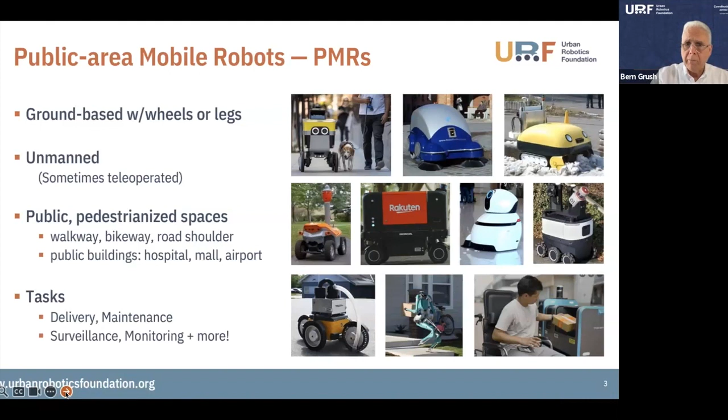On the lower right, that person is taking a delivery, but there are no humans present. These devices might be teleoperated, but they're always in public spaces, pedestrian spaces, all sorts of indoor and outdoor. What matters is that there are pedestrians nearby. These devices do all sorts of tasks: delivery, which we'll hear about today, maintenance, surveillance, monitoring, and so on. Any task amenable to robotic action is included.

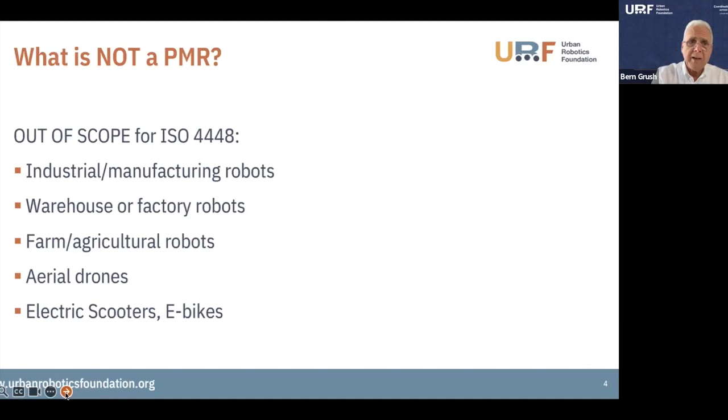Out of scope is anything in a structured environment. I'll talk about that in a moment, but those working in warehouses and manufacturing, on farms or in mines, for example, are excluded. Aerial drones are not included. Electric scooters and e-bikes are not included. So it's not just because it's a small thing on the sidewalk — it's that it's robotic, it's in public spaces, and it's on the ground. Those are the important issues.

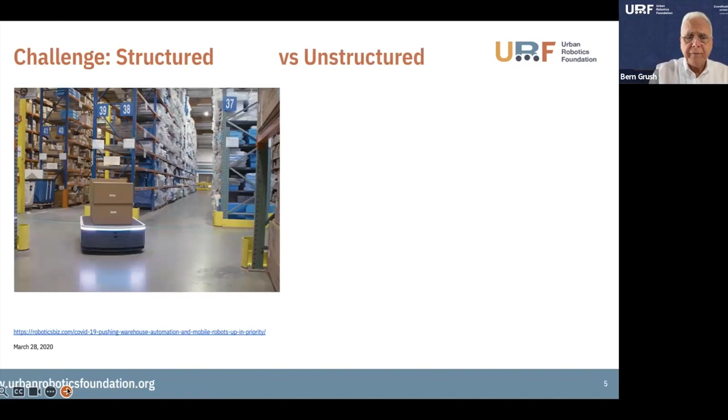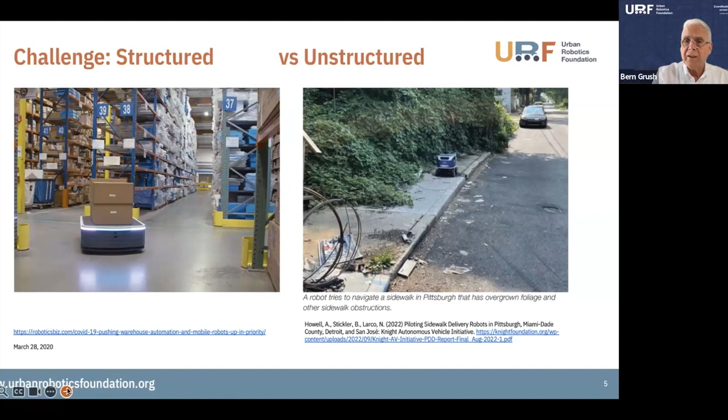Structured environments, which we know a lot more about, have been around for a long while. Robots have been around for 50 years, but in heavy commercial use for the last 10 or 15, in manufacturing and warehousing. Now if we want to move them to the sidewalk, here's an extreme case. On the right is an extreme example of a very obviously difficult place to navigate — a horrible example of an unstructured environment not designed for robotic use. So that's the major difference.

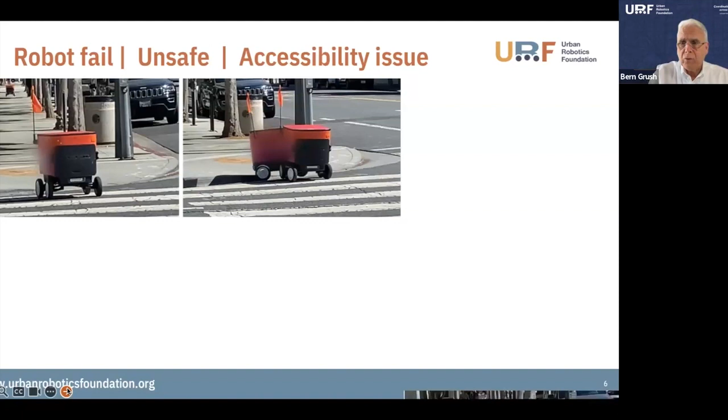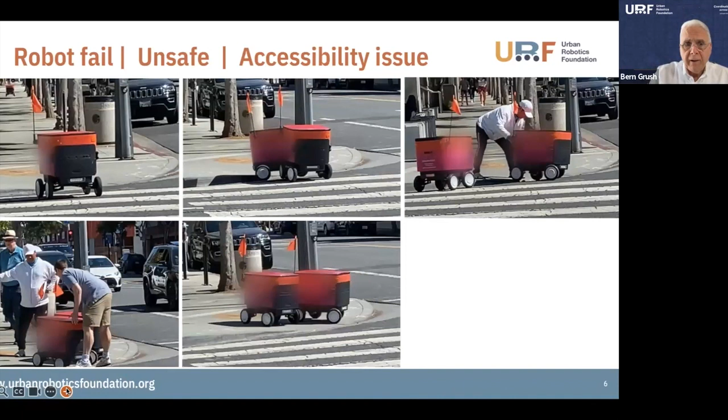Then a pedestrian came along to try to help out. Consider that we ought not to have pedestrians volunteering to move these devices because of insurance concerns. A second pedestrian came by to help out as well, making it yet more complex. Eventually the two pedestrians repositioned them on the sidewalk, but in the area where the ramp is, which would then block wheelchair use. Finally, someone from the company came along to move one of them away.

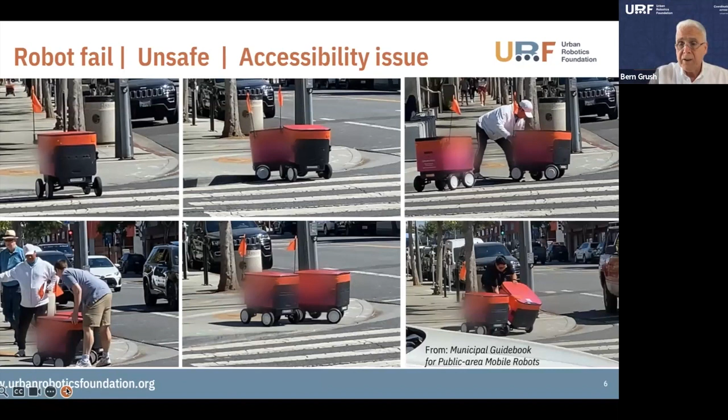The point of this is that we need a body of rules that minimizes this kind of event ever happening — that minimizes pedestrian involvement in moving and rescuing these devices, because of the insurance concerns and because of the safety of other pedestrians in proximity to the robots.

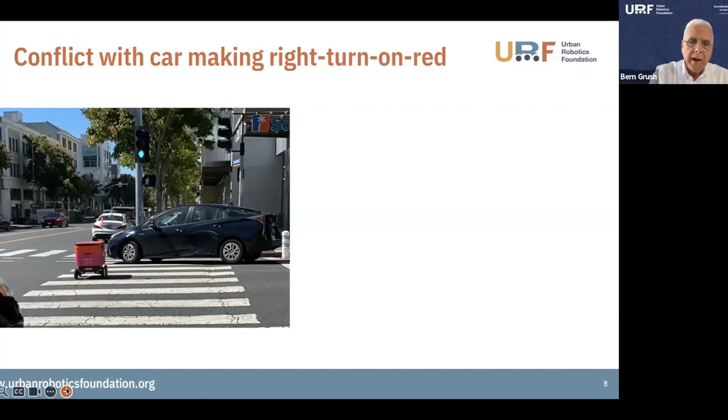Here's another case with the same robot that was waiting. It finally decided to cross the intersection, and did so correctly, on a green light. While doing it, a car blocked its path. What happened then is that it's dangerous for the robot to turn around and go back, because the light might turn red. So this robot chose to go around the vehicle, and in doing so, went out into the area where a cyclist might be traveling. So these are the kinds of things the standard is set up to avoid, or to help write bylaws about.

This is talking about all forms of human mobility challenges. We often consider wheelchair users and blind pedestrians as the obvious cases. This is a case of a disorder called kyphosis, where this pedestrian cannot stand up straight and cannot see very far forward. In this case, and this person is not blind as far as we know, a PMR could block her path.

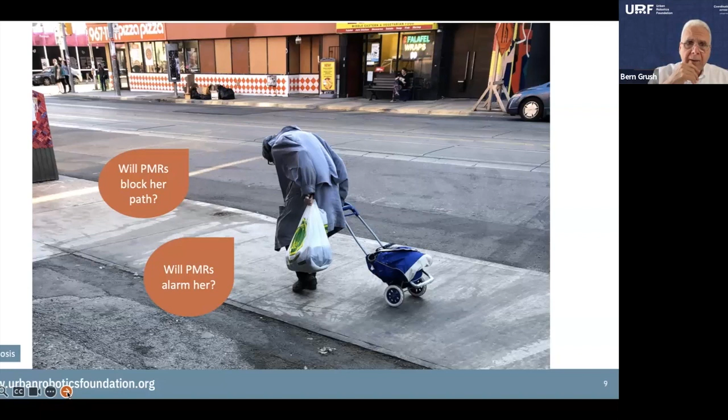It could alarm her as it comes by her. But the flip side is that PMRs could deliver groceries to her, or a follow-me PMR could carry her bags for her. While doing so, it could actually help protect her, because the PMR would be able to see further than this pedestrian could. So the net of it is: how do we have the world collaborate with and help people with mobility challenges while serving them, and make sure we don't alarm or harm them while operating on the sidewalk.

So that's a dual case. So very quickly, we were founded just about 2 years ago now, and we work in this. I think you can see it's urban space and accessibility, as I just showed in the last couple of slides, and these mobile robots.

The draft of the standard that we're working on - we are the project managers of an ISO standard that Lee has already described to you. That draft is to be published in 25 and 26. There's 16 parts to that draft. I'll talk about that at the last slide if we have a few minutes.

We are publishing a municipal readiness guidebook that will start early next year. Those are already over half written. And we deliver workshops and educational materials, advisory services as well for those cities that are setting up pilots and trials and so on. And I underscore that we are a global organization. We have members in many countries around the world, and we are a nonprofit.

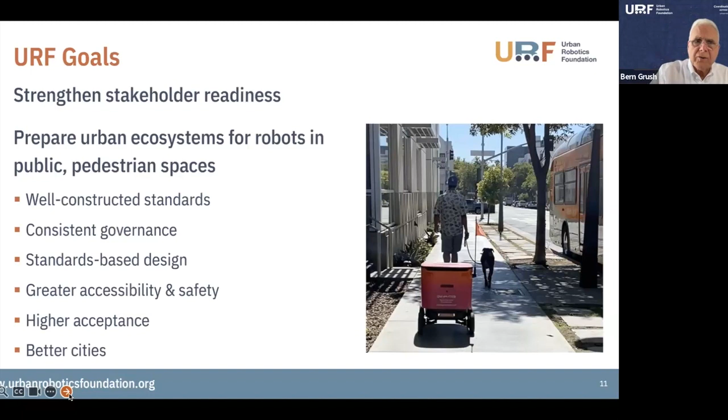So, of course, it's important that these standards are well constructed, that they're consistent, that they are focused on project and deployment designs, that they always are focused also on greater accessibility and safety. And we're seeking acceptance from the populations of people that these robots are operating in, and altogether to have improved city livability, better cities. So our members, you can see here, include government planners, because our writing is geared toward government planners and sort of smart city public works sort of things.

Public facilities as well - hospitals and airports have pedestrian spaces within them that these robots operate on. In fact, our speaker today, their robot frequently operates in airports, inside an airport in that pedestrian area where passengers are occupying, waiting for flights and so forth. We're concerned very much about accessibility, as I think we've made plain in a few slides ago.

Technology companies such as Ottonomy today is considered a technology company. Also fleet operators - in this case, Ottonomy also operates fleets that they built themselves, so they sort of do both roles. And of course, we have researchers as members as well.

So how this works together - why there is on the left this issue about standards, and you can see some of the standards of mapping and orchestration and safety and certification and so forth. It's all sort of technology oriented, logistics oriented, operations oriented, and it's all about improved delivery of technology, not delivery of food, but also that.

In any case, on the right, with the guidebook, it's really about governance and livability. And in this case, it's to boost urban confidence. So how these two work together: in the middle, on one hand is industry, on the other hand is cities. On the left is technology, on the right is projects, on the left is methods, on the right is regulation. So these are the pairings of the concerns for two sides. These pairings have to match, and that's our fundamental goal.

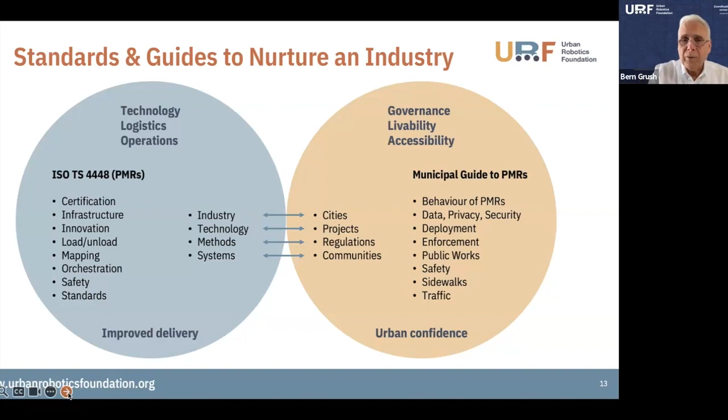What we are doing is those four lines in between these four different expressions of goals, to create an environment where these are safe, valuable, commercially viable, and livable.

So as a member, our principal activities are to help you get prepared, help you to anticipate the impact. Again, this sentence is for municipalities and planners. The roboticists are getting themselves prepared - they don't need our help to prepare themselves, but cities and planners do. All of our members help shape the international standards, and they also help shape the guidebook as well. And critically, our members can network. Today is one example of a potential opportunity to network, in the sense that you can meet each other and you can engage offline, of course, but that networking is a very important part of what we do.

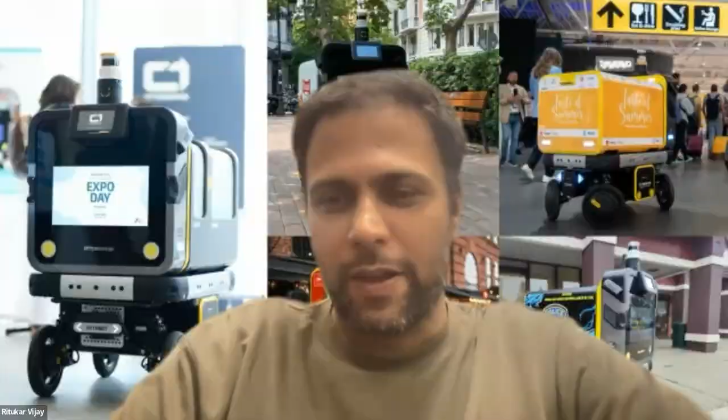Yes. So, hi, everyone. I gave a brief introduction about myself. So, if somebody else has joined, I'm the co-founder and CEO of Ottonomy. And what we do is we develop these autonomous delivery robots for deliveries in hyperlocal space, be it indoors and outdoors. Now, one of the most important reasons why we are doing this is, more focused around labor shortage.

At this point in time, specifically after COVID, there is already a labor shortage, and a lot of people have repurposed themselves to other roles. Because of this, there's a specific deficit of people who can do deliveries. And because of this shortage, there's been a substantial increase in wages, more than 100%. Before 2021, hourly wages were moving around $9 to $12, but at this point in time the running rate is $18 to $25. It has not happened in the last 15 to 20 years, maybe more, that there's a 100% hike in a very small duration of time. So it's very critical, and something needs to be done around that.

It's not that increased wages is the core problem, but how it results either for the enterprises or for customers like you and me. When we order something, we pay almost $7 for a $10 burger, and we add $5 tip, so we end up paying $22 for a thing which is worth $10. So from all those aspects, I think this is an interesting time to put these robots out in public.

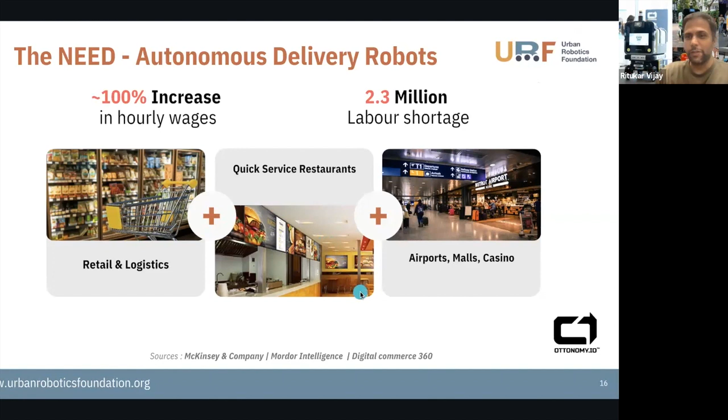Our customer base is spread across retail and logistics, quick service restaurants, and airport malls and casinos. We were the world's first to do any autonomous deliveries at airports, and it's very interesting how multiple aspects come into an airport environment. Broadly, we have the same set of robots doing outdoor and indoor deliveries. For outdoor, these robots are doing hyperlocal last mile, which is anything within a radius of 1.5 miles.

While doing this, the robots are navigating on sidewalks or crossing streets. These robots are also doing indoor-to-outdoor maneuvers, like bringing items from inside the store to the parking lot, which automates curbside pickups. At places like airports, malls, and casinos, they're doing deliveries from the kitchen to various locations within that large area. This is heavily strained because customers want delivery, but people are not available to make those deliveries for them, so that's why the need comes around.

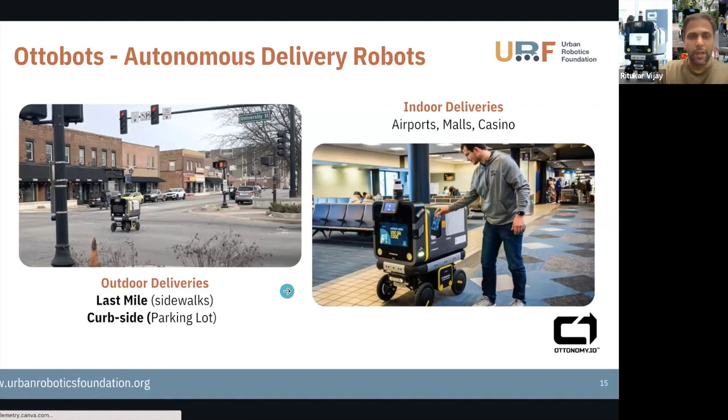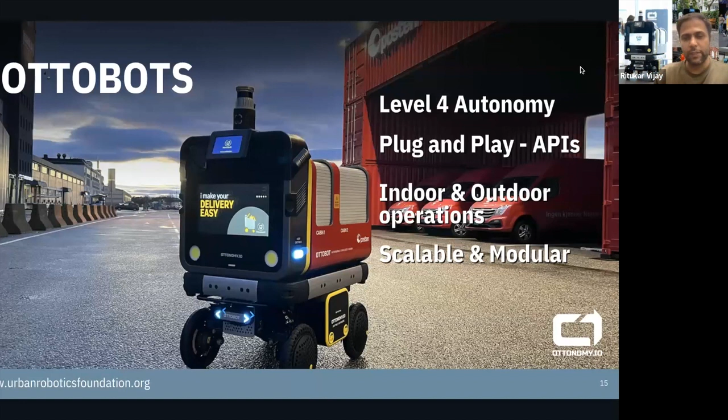Just a brief on the robots: these robots are L4 autonomous. When we say L4 autonomous, it doesn't mean 100% autonomous—these are 99% autonomous, because the environment in which they operate is very dynamic, and there can be certain edge cases. The overall approach toward solving the mobility aspect is to make the robot fully capable of doing autonomous navigation. For certain edge cases, we have a fallback teleoperation, which we'll talk about, and that's why this is L4 autonomous, not L5. We can integrate with any aggregator or app to facilitate different types of deliveries, and these are indoor and outdoor.

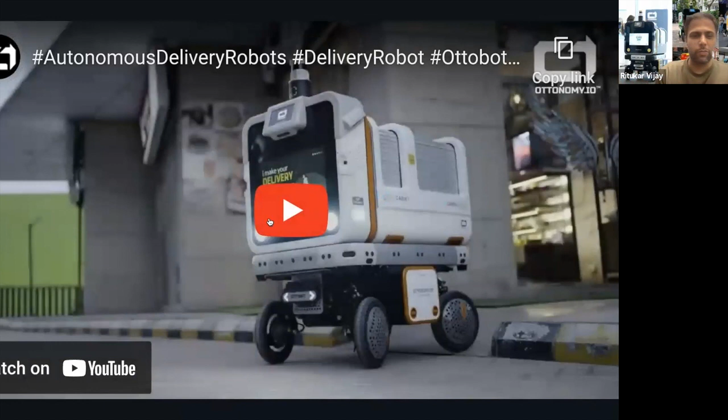I'll just play a brief video that will give some context about what these robots are capable of, or what they have done over time.

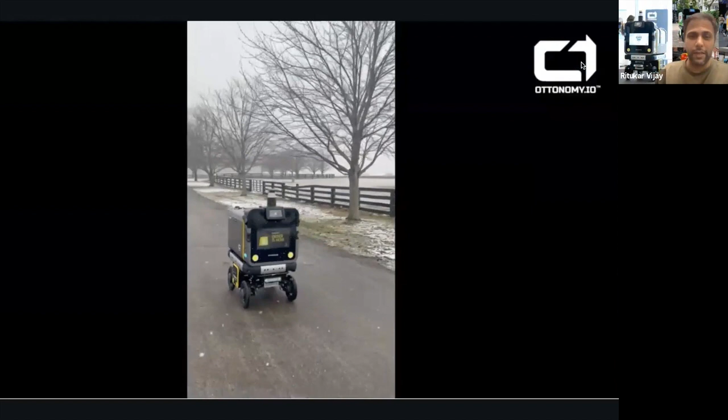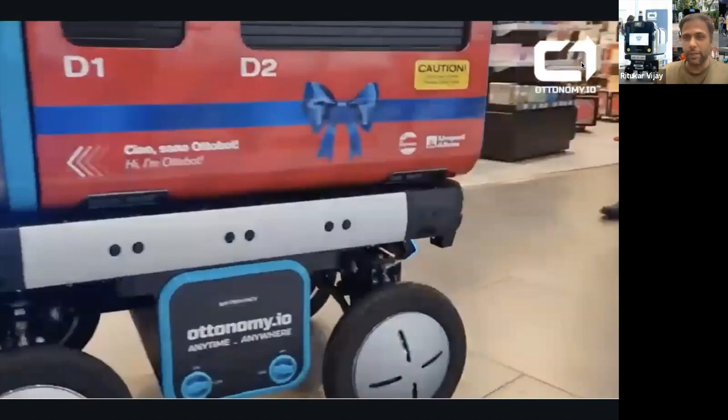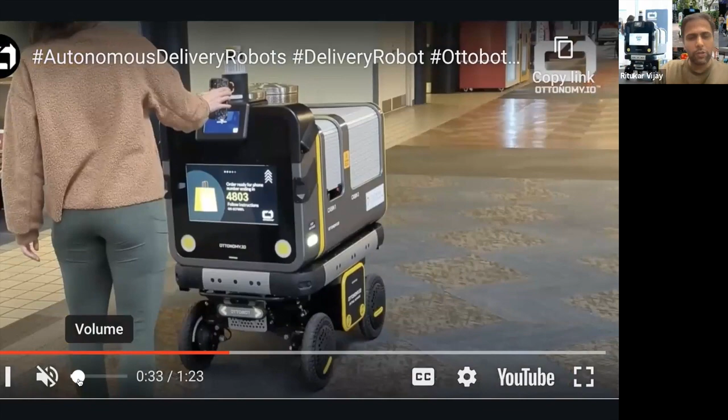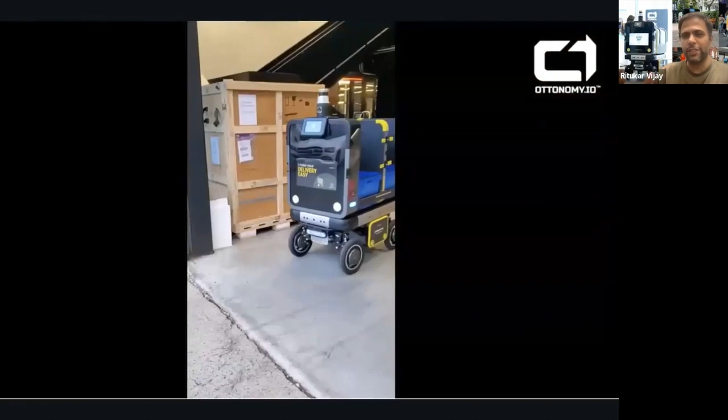We have tested with our customers in different locations, different environmental conditions, different use cases—you see these robots during a snowfall, after the snowfall, inside airports, which is a completely structured yet dynamic environment, and on the sidewalks. These deployments are spreading across multiple geographies: North America, Europe, and the Middle East. Apart from different regulatory frameworks, even the demography changes—people's perception and their expectations also change with a change in geographical setting.

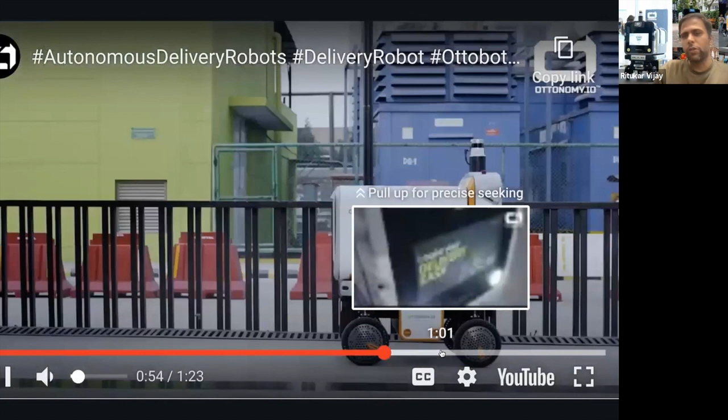It doesn't stop there. One thing we figured out was that we wanted to do multiple deliveries in the same trip, so we needed slightly larger robots. But the problem with larger robots is that maneuvering in tight spaces is really tough. So we came up with a specific drivetrain which can move sideways, doing a crab walk, and take zero-radius turns.

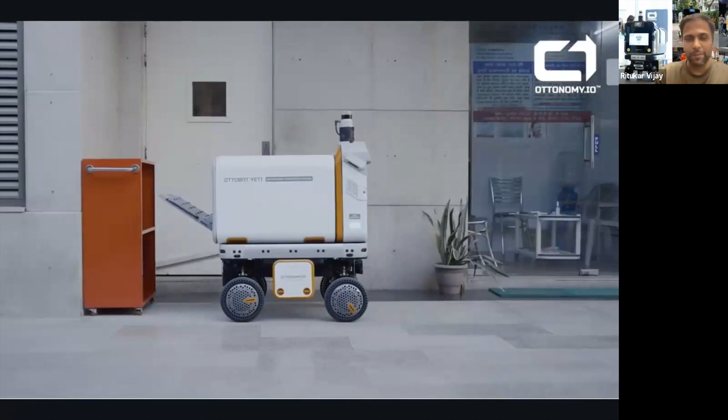When we talk about food deliveries, you are always there to take it. But when we're talking about parcels, somebody from any of the logistics companies might be throwing it to your gate. So how can we navigate that aspect? All this is taken care of by these robots, and we call them Ottobots.

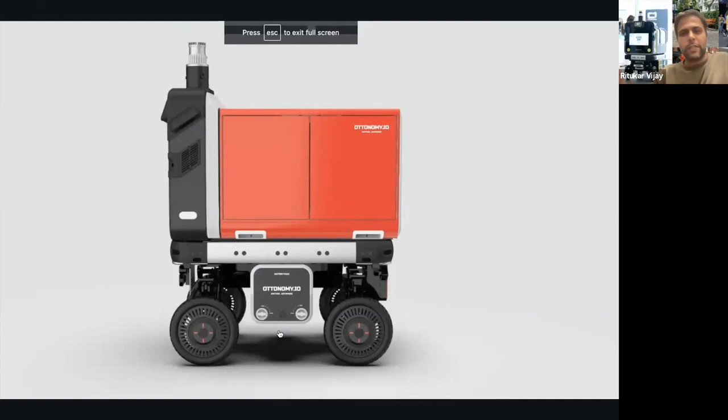These robots are scalable, so you can have multiple configurations based on business needs. It can be lockers, one large compartment for groceries, or 8 to 12 compartments for small parcels. We designed the robots in such a way that the robot stays the same, but the use case or the business can customize it for their needs.

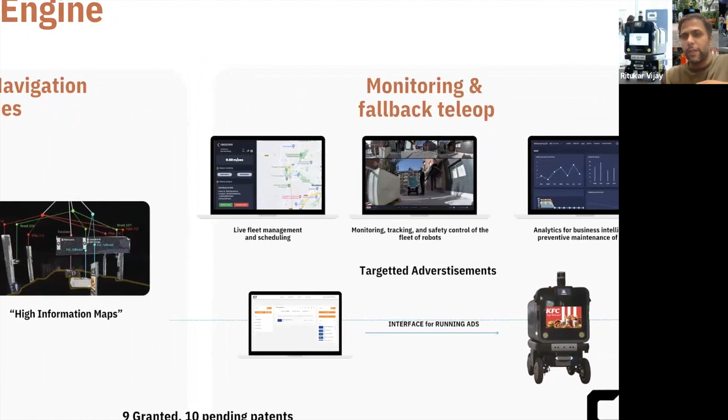So broadly, as I said earlier, these robots are fully autonomous using contextual navigation for both indoor and outdoor environments, which works without GPS, but also has a fallback teleoperation where you can always monitor what is happening around the robots, or the robot will give you an alert that it needs help. I'll tell you why this is important when it comes to today's topic regarding standardizations.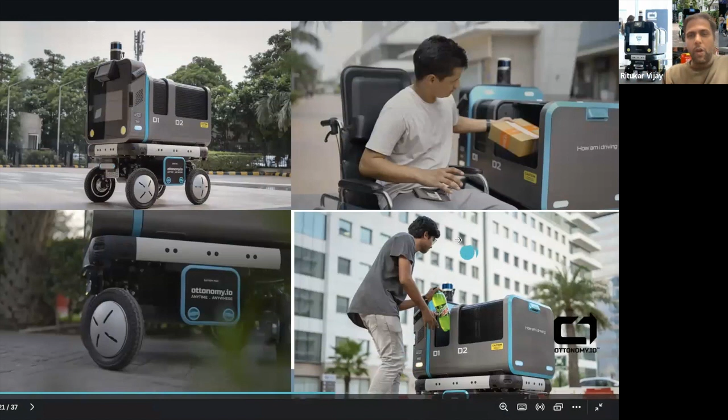Also, one of the most important things we kept in mind, apart from all the technology and different aspects we discussed, was accessibility, because what we are doing here is sharing sidewalks which are meant for people, which were originally designed for people. So if we are sharing those areas, we need to have mechanisms to make these robots capable of assisting them at the same time. So when we design the robots, it is made sure that people on wheelchairs or with special abilities can access those packages comfortably.

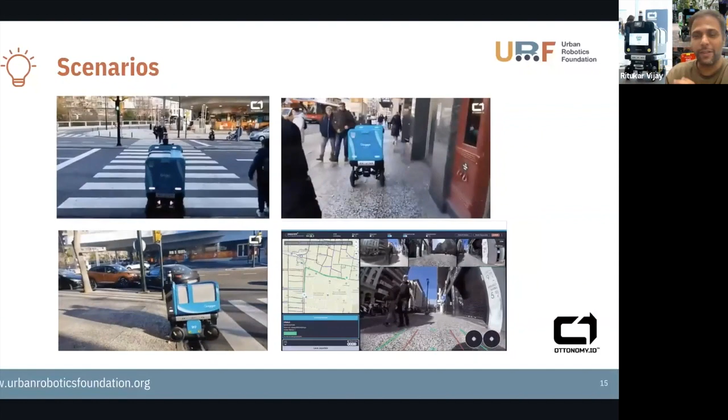The robot is managing those, but there are no guidelines from the municipality either. What if there was a person on a wheelchair who wanted to cross the road? It is literally impossible for them - it is a lot of movement for them.

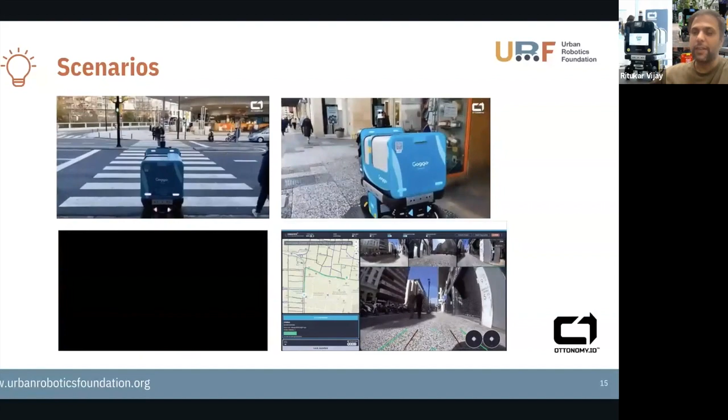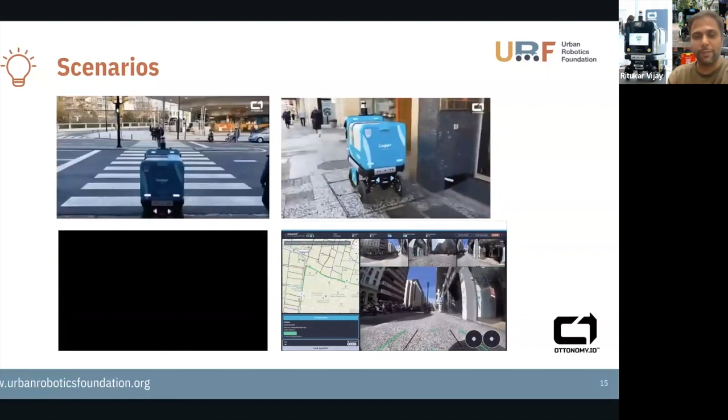And the important thing is that the municipalities are also not aware of how many places are like that - they do a periodic check. But if there is a mechanism, these robots can give them live data that, hey, this is something you can focus on in the next quarter or so to increase your ADA compliance coverage. So that is something which can be given, but again, there is no standard for that, right? So there is no meaningful exchange of information which can be shared with the municipalities.

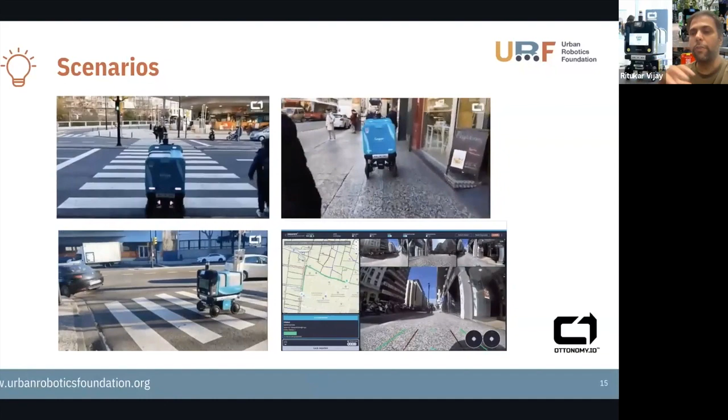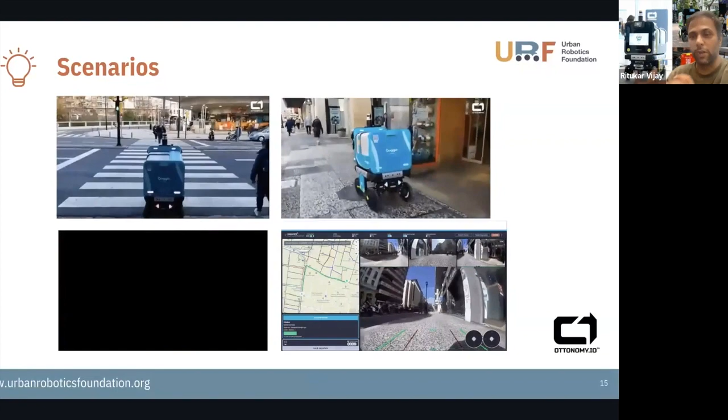And then last but not least, what you see on the right bottom is the monitoring suite. So we have these robots which are monitoring, and this is more like brought in just for the sake of this conversation - how to make sure that the data for the monitoring of robots is secure, and how we maintain cybersecurity and other aspects. So all those aspects, they not only require, but they are shouting out for a standard, right?

Now, obviously, as I discussed about road crossings, there's also an infrastructure element - there are certain parts in the US where you have to press a button to either prioritize or even enable the pedestrian light to turn green. Now with robots, nobody's going to press a button. You need to have an interface with the infrastructure to communicate with it, right?

And we've been talking about V2X in autonomous cars for a long time. It's all talked about, a lot of standards, but this is a real need right now. There is a button which needs to be pressed, and there's nobody to press it. So imagine 11 p.m., the robots are waiting at a street light for somebody to come and press a button so that it can cross the road. So there is no V2X standard for these kinds of things, and there are companies working on it, but it's still open.

And we already discussed kids - behavior around kids. How do we define safety? Now, since I touched upon infrastructure, there's another thing which I just wanted to share.

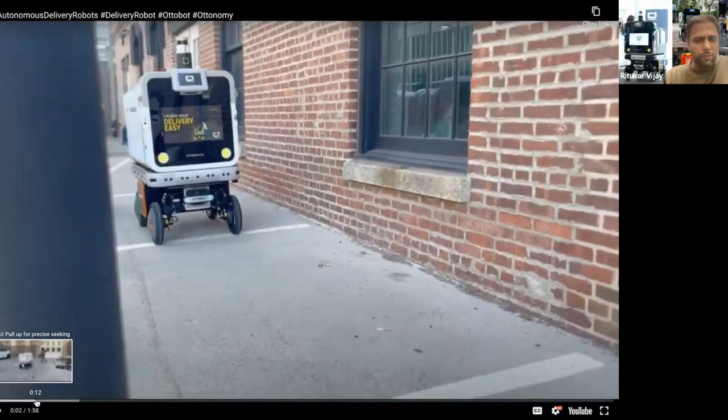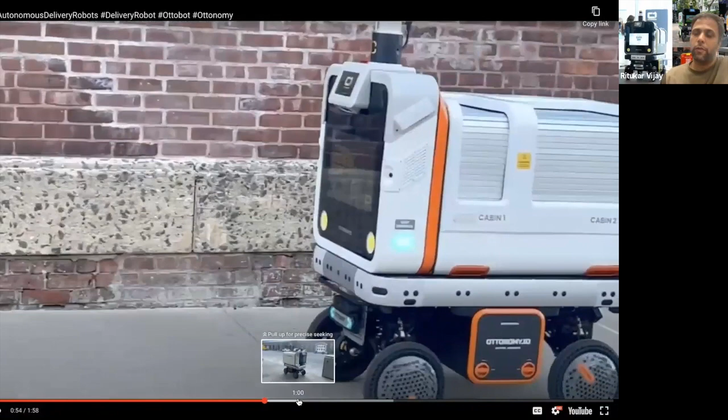I'll just quickly move this video. So this is our New York office, and we are doing some integration where these robots are navigating on the sidewalks, but also coming up and interacting with new functions or new types of infrastructure elements which can be required.

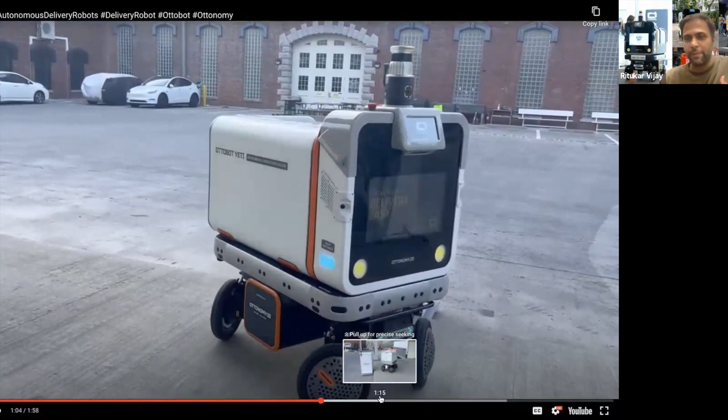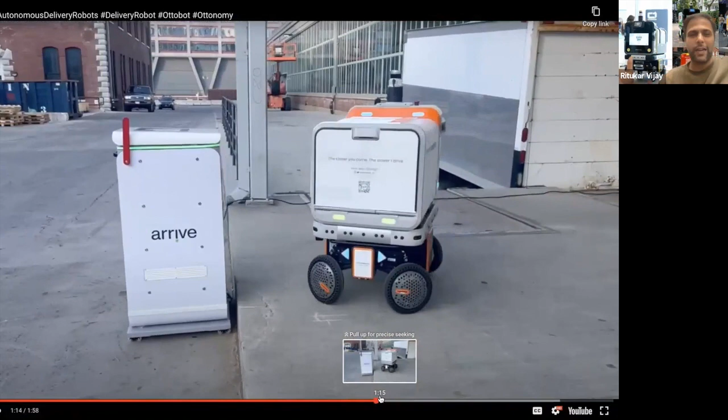So here what we are doing is we are talking to a smart mailbox, which is again an infrastructure element, where the robots are directly delivering into a smart mailbox. The robot comes in, aligns to the smart mailbox, and then delivers the package to it. So the door opens at the mailbox, the robot just puts the package inside and goes away, right?

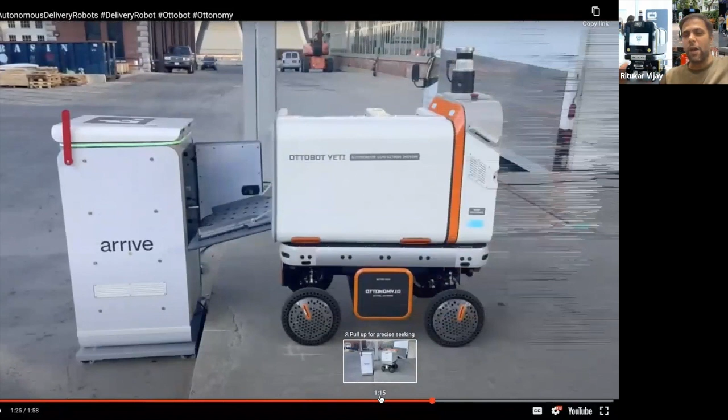Now obviously these are all new things, and this is just one example - there'll be more coming, right? So the same mailboxes are a new set of infrastructure elements which can be brought in and talked about. But again, there is no standard for that, right?

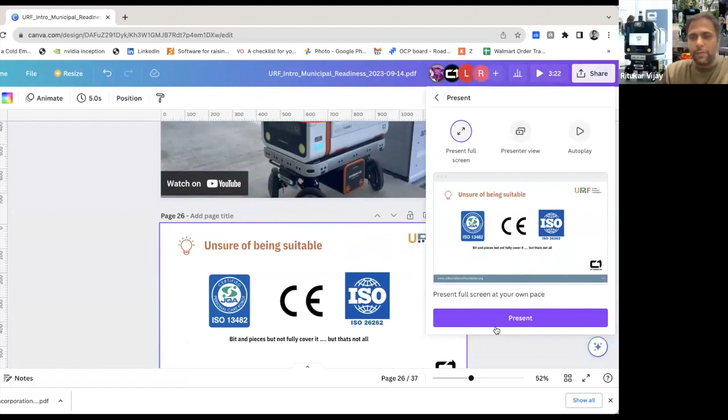So, I mean, now we look at what is available in the market, what we have been dealing with, right? So when we talk to different customers in different geographies - we were talking to a customer in Southeast Asia, and what they said was, hey, there is no standard for delivery robots, so why don't you comply to ISO 13482, which is a personal care robot standard, right? Of course, how they see it is that there are robots, there are people, so whatever personal care robot standards are, you should comply to that.

But it doesn't make sense because these robots are running outdoors, and how can you define safety compared to something which is somewhere else in a completely different ODD. So they're doing it because there is no standard, they're doing their best, and we kind of identify certain segments just to make it work, but it's not so clean, right?

Second, in Europe, all the robots have to be CE compliant, which is absolutely fine. There is no issue on that. But just being CE compliant doesn't cover 100% of the certification process or the standardization of the operations.

Then a few customers also came around like, hey, do you comply to ISO 26262 because you are on the road? So we then try to make them understand that ISO 26262 is for autonomous cars. When the vehicles are running on the road, we're not running on the road, we're just on the sidewalks at less than 10 miles per hour, and we only cross the roads. So we have to make them understand that we don't have to go through the automotive standards. That's why this becomes so important, because everybody's trying to align to some sort of adjacent use case.

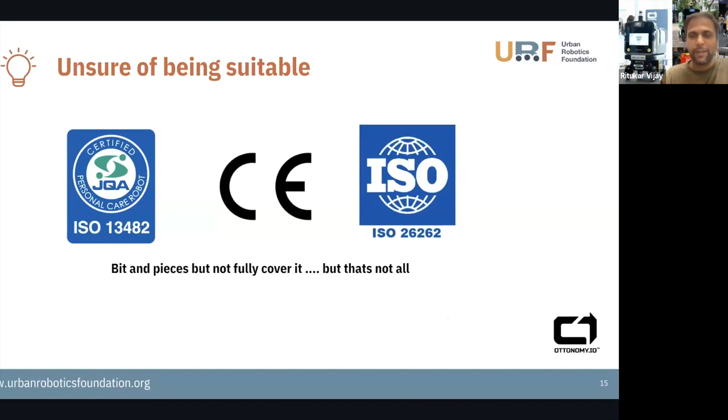And people also use the warehousing robot standards, the standard mobile robot standards, as well. So let me take you a little deeper into the disconnect.

If you look at the United States, there are 20 states who have passed bills for these personal delivery devices. That's what in the legislature they call PDD. And if you see, all of these have some difference from one another. Some allow only a 100-pound robot, that is the weight limit of the robot. Some allow a 550-pound robot. Some go till 10 miles per hour, some go 12 miles per hour, and so on, 7 and 6.

So although there are some regulations, there has been a constant effort not only by the states but by each municipality, based on their judgment, their understanding, and their interface with whichever company is doing trials or pilots in their city. So they came up with a standard, but...

Imagine if there is a large QSR or a large retail company in the US which is present in all 40-plus states, and they want to scale. They did pilots in one state, but they want to scale their operations. Imagine the amount of work they have to do to scale across the states, because each state has different regulations.

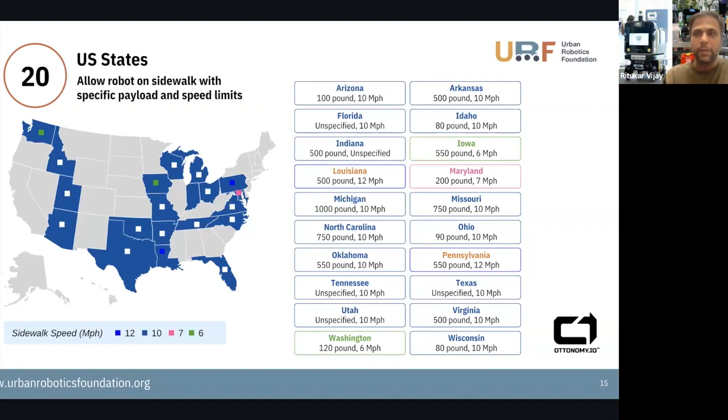So this is why I'm bringing this up: although a lot of municipalities have done wonderful work even to get to this point, there still has to be some uniformity that comes in, and there, URF can play a wonderful role.

On top of it, the onus comes to the robotics delivery service provider to figure out the regulations and whether they're allowed to run in those places. I'm present in 40 states, if you go along with us, you have to take all the approvals, based on cities, states, and countries. For example, the Middle East is coming up with their own standards, their own local regulatory understanding of things, because they don't have a specific ISO standard that gives them the infrastructure to take it, absorb it, and then customize based on their specific needs.

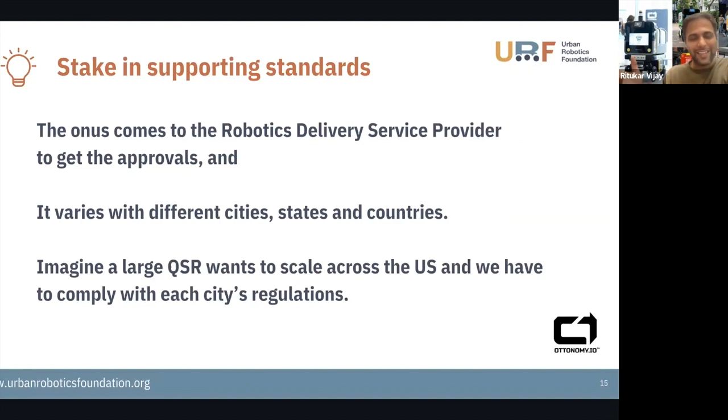Over and above that, that's our learning, that's our observation over the period of time. We have deployed fleets in the US, in Spain, Rome International Airport, Cincinnati International Airport, the Postal Department of Norway. We also ran these robots for the police of Peoria, Peoria PD, as surveillance robots, just to help them detect if there is any shooting happening. So how can these robots be the first responders?

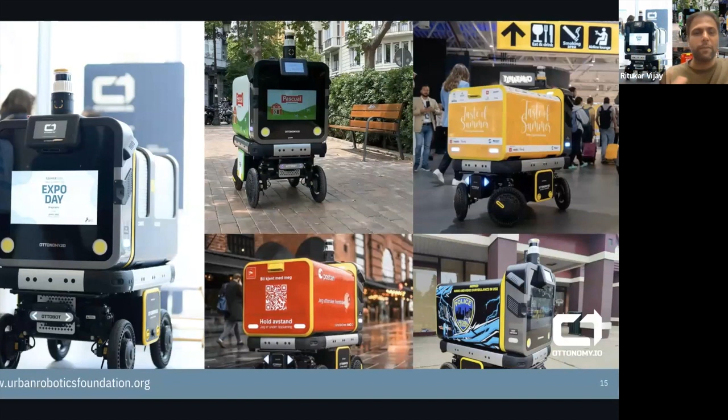But in all these scenarios, these robots are pretty much out in public. That's why we see there's a lot of new things that need to be done here, and we've been doing what we can to make deliveries what they should be for all of us, specifically when we talk about public robots.

So right from 2021 till '23, we made it to Robotics Business Review's top 50 robotics companies list. And all this is good, but the important thing is that there were very few public robots in the list. Most of the robots were in constrained environments, in warehouses, automation, factories, and all that. Even NASA, JPL, and other companies were also in this top 50 list.

Now the public robots are getting into the mainstream, they are getting absorbed, and there's a long way to go. Also, apart from deliveries and first responders, these robots have a huge impact to be played in the sustainability aspect.

Specifically, why do you need a car to deliver your groceries? I mean, which can be done by an electric robot, right? So I think from all those perspectives, this all makes towards our effort for a more sustainable future.